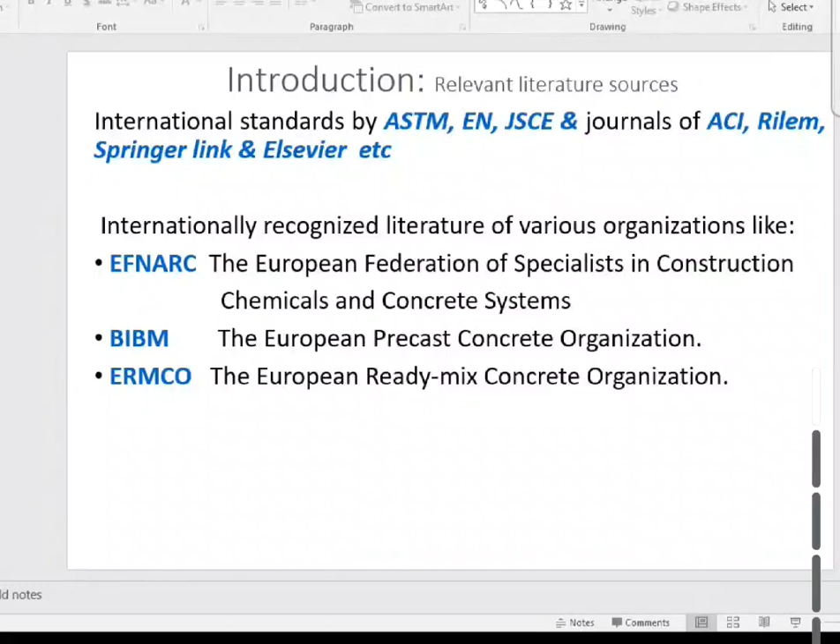Anyone else who has listened to this? Okay, is this slide visible to you now, which I'm sharing with you?

Yes, sir. So, okay, talking about self-compacting concrete, this is the concrete which can, you can say, compact itself without any kind of external effort.

The standard regarding this, which we use, is EFNARC, which normally deals with this development, and ACI is also there. ACI Committee Report 237 deals with self-consolidating concrete.

It is defined as a highly flowable, non-segregating concrete, which can spread into place, fill the formwork, and go into the reinforcement without any mechanical consolidation. You don't need any mechanical effort. This is the definition by ACI 237 report.

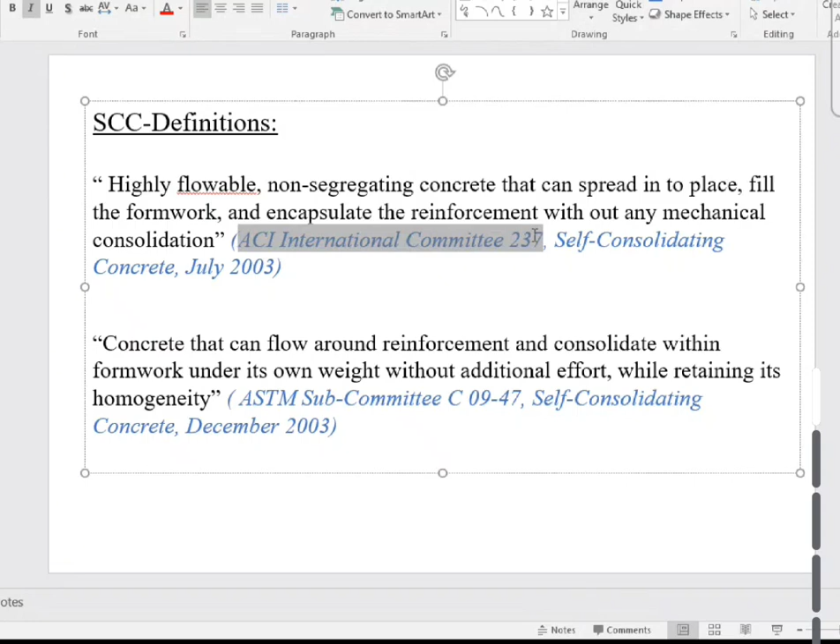However, talking about the ASTM subcommittee report, it says that concrete can flow around reinforcement and consolidate in the formwork under its own weight without any additional effort while retaining its homogeneity.

These two definitions are there by ACI and ASTM, but you can say that any concrete which is self-flowing, you don't need any kind of external effort to make it flow or compact, that is called self-compacting concrete or self-consolidating concrete.

Are we clear? Students, are we clear?

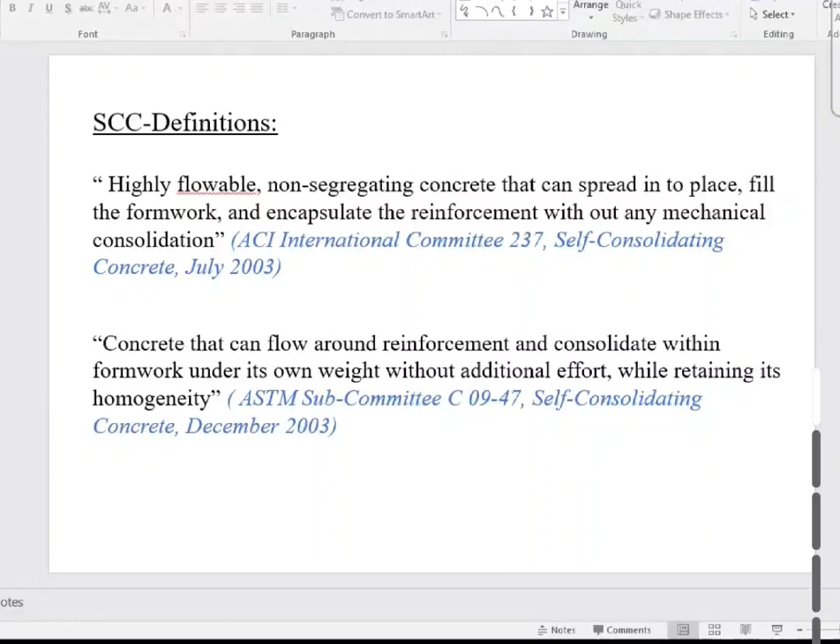Okay, what is the difference for self-compacting concrete? So the self-compacting concrete has three characteristics.

Number one is its flowability. Number two is its passability through the reinforcement. And number three is its stability, that there is no bleeding or segregation. So these three things are there.

Normally self-compacting concrete is highly fluid and consistent like honey. So you can say that a self-compacting concrete can be classified as that which can fulfill these three conditions in fresh state: it is flowable, it is passable, and it is stable.

That there is no bleeding or segregation. Then you can name it as self-compacting or self-consolidating concrete.

Now we talk about fluidity and consistency. There is a term called rheology. The rheology means how easily concrete can flow, or how much effort you need for the concrete to make it flow.

So you see with this plastic viscosity and yield stress, the self-compacting concrete is highly viscous or plastically flowable without any kind of yield stress. Normal concrete needs more effort to make it viscous or flowable.

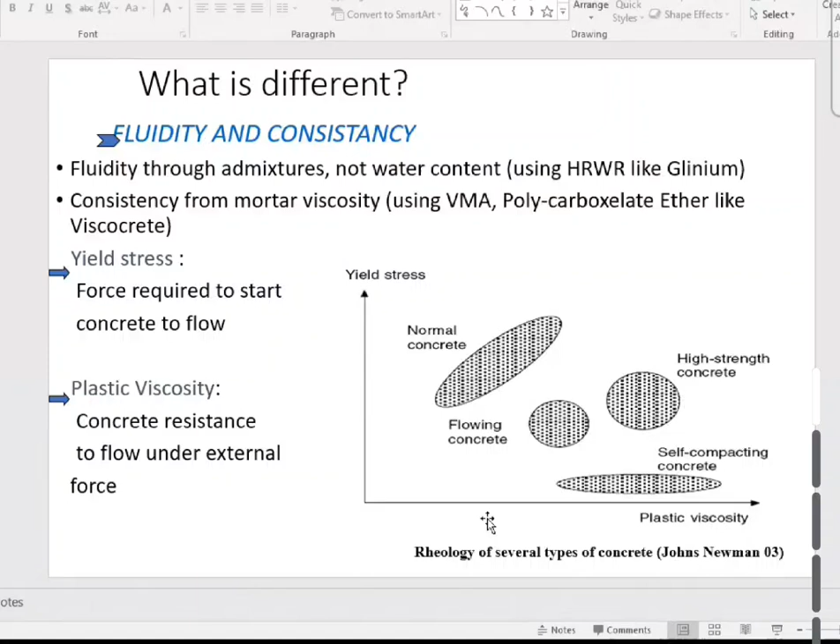Now, can you tell me how to make the concrete flowable, passable, and stable without increasing its water to cement ratio? How can we make it flowable concrete?

Very right. We can use different kinds of admixtures which can be used as high range water reducing admixtures, HRWR we name them, this is the real name. You can name it as high range water reducing admixtures. These admixtures can be by Sika, by BASF, by any chemical industry, but they are used to make the concrete flowable with lesser water to cement ratio.

So how these chemical admixtures work, can you comment on it? Because we are not increasing the amount of water content, so water content is same. So then what is the phenomenon which is making the concrete flowable?

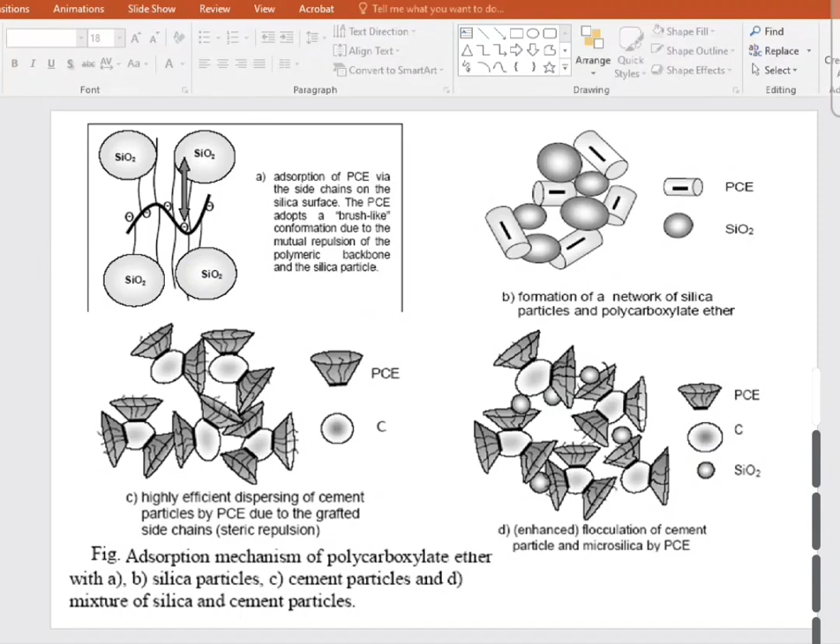Now there are also other kinds of admixtures. Once you don't increase the water to cement ratio, there may be a possibility that your paste volume is low. Once your paste volume is low, the chances are that your aggregate content will be higher and paste volume will be lower, so you will not get a thick mixture. You may have a very high volume of aggregates, low volume of paste, and your system will not flow properly. So again, the problem in...

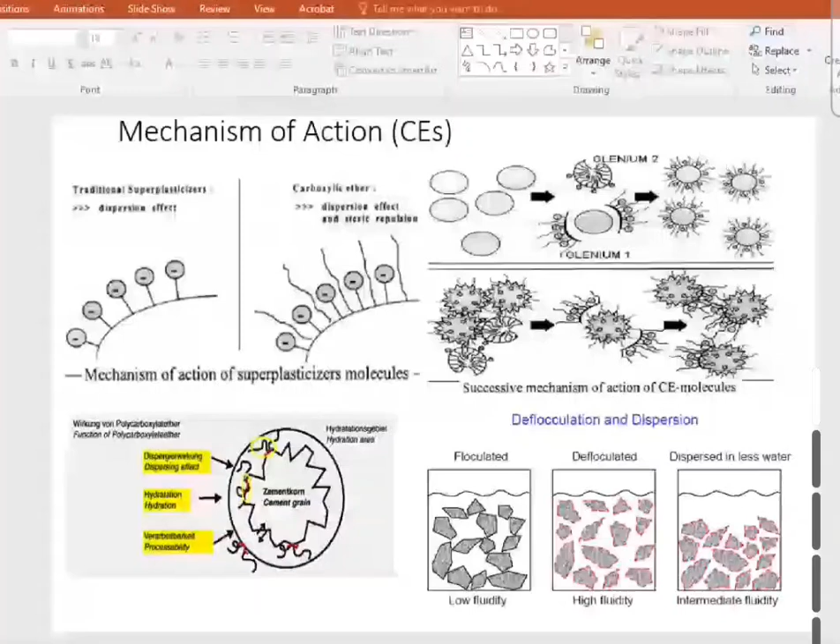the self-compacting concrete is that it seems it should be consistent as well. Consistent means it should be consistent like honey. So what we use in this case is VMA. What is VMA? Viscosity modifying agents are being used in these mixtures. So what is this mechanism? It is also gel-like, which can retain water by adsorption or swelling.

So this is a mixture. Once you add water into it, it can form a gel network. This gel network is more like a polymeric structure, something like this. And this gel gives you the apparent picture that the mixture is more consistent. This is how we see this gel formation. Are we clear? So two types of admixtures are used in self-compacting concrete: number one is high range water reducing, and number two, we use viscosity modifying agents. Are we clear?

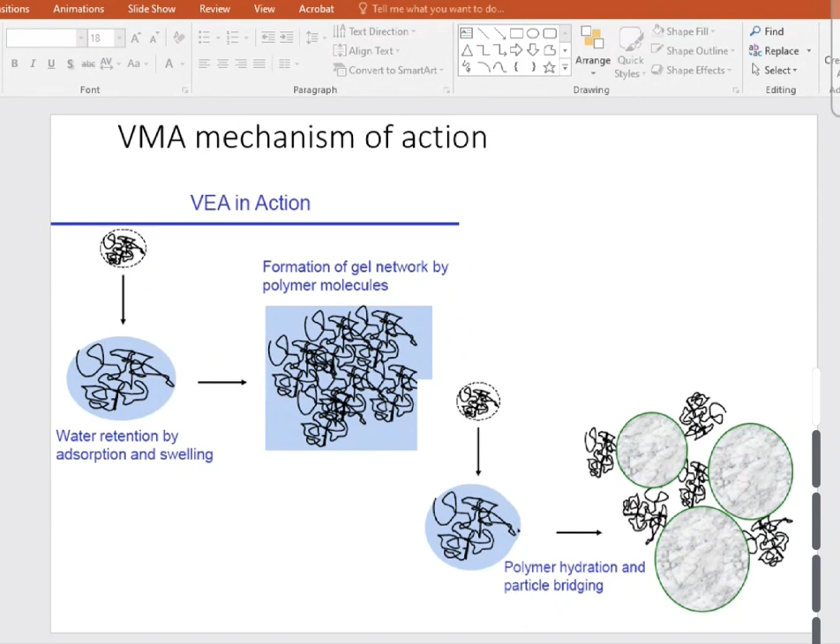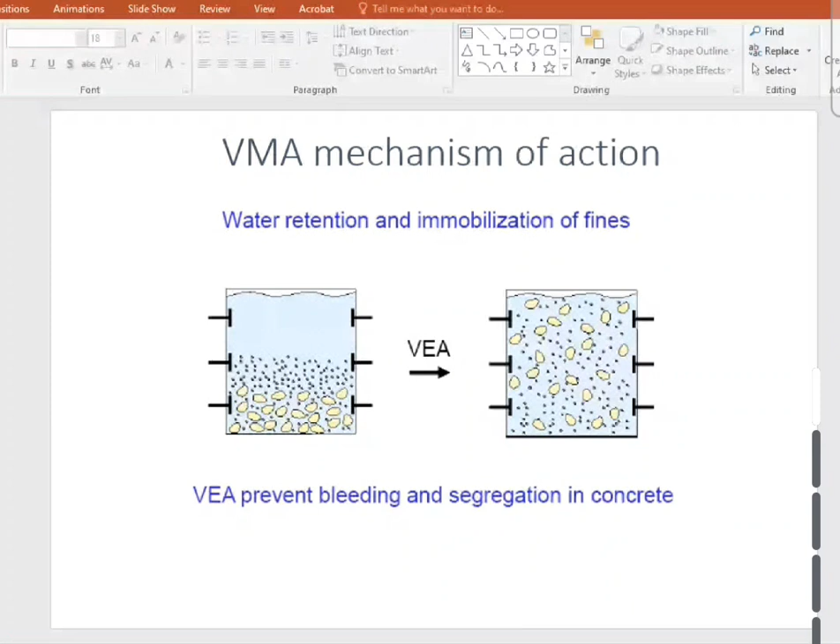So if you see over here this schematic diagram, the mechanism shows there is a settlement of larger aggregates, then smaller fine aggregate, then water. But once we add the VMA, this viscosity modifying agent, it makes it a homogeneous mixture that immobilizes it, so all the aggregates and fine aggregates are well dispersed into the system. This is the beauty of VMA, how it increases the viscosity and you can say gel formation of the structure.

Now if we compare self-compacting concrete with the regular admixture or regular concrete mix design, in normal concrete, how much is the percentage of coarse aggregate there? Can anybody tell?

But in case of self-compacting concrete, we have a lesser amount of coarse aggregate, whereas fine aggregate is slightly increased. We normally have 30 to 35% coarse aggregate, and the rest 30 to 35% is our fine aggregate. So what does it mean? We are increasing the paste volume in self-compacting concrete. Are we clear?

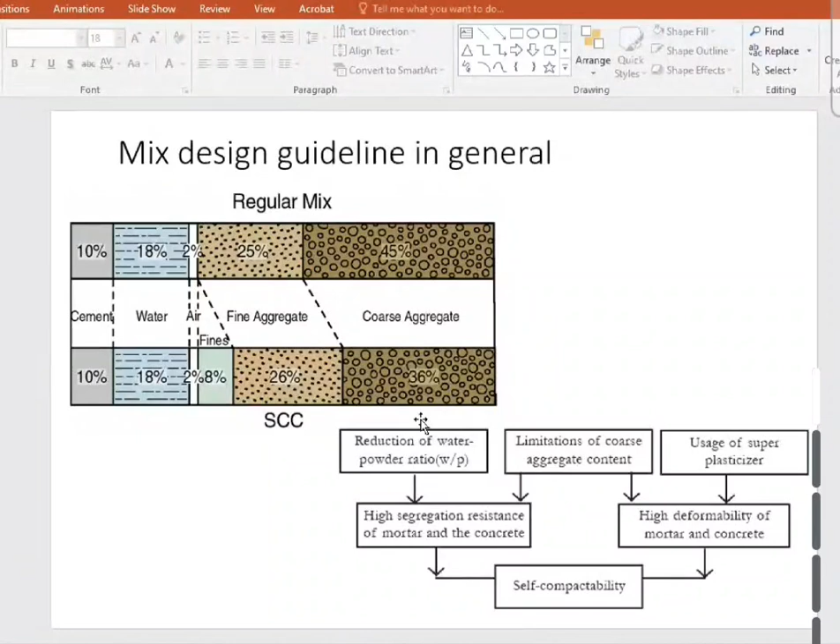So I have discussed with you initially the definition of self-compacting concrete, what are chemical admixtures, how they perform, what is VMA, what is the mix design, how it proceeds. So next is, what is the advantage or significance of it?

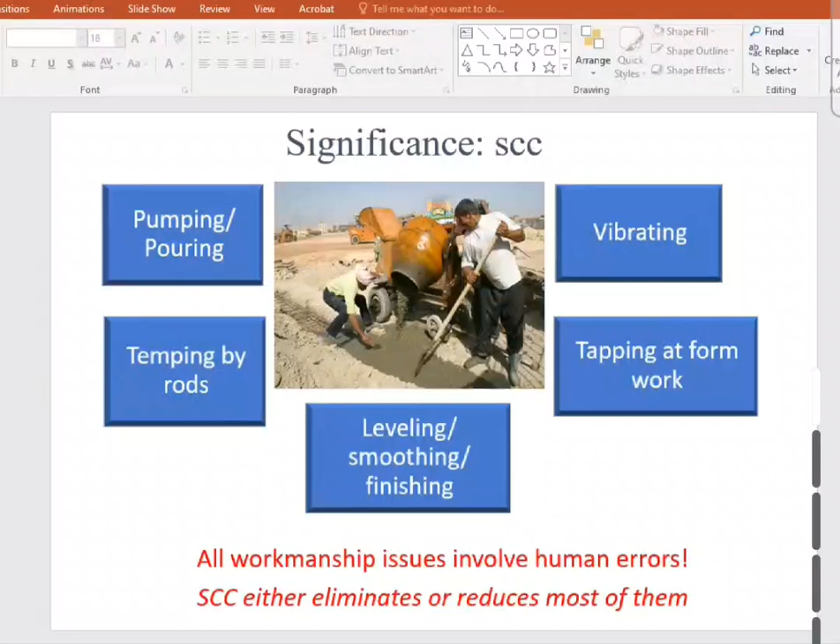You don't need any kind of labor. Even seeing the volume of the site, you don't see any labor over there - just one mixing concrete truck, and a pipeline which spreads the concrete. This is the major advantage of self-consolidating concrete.

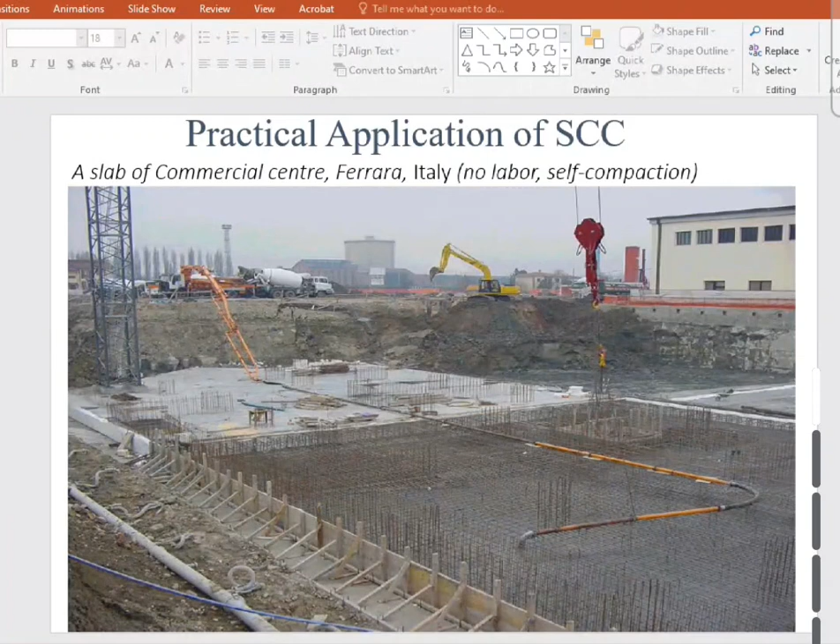Are we clear? Yes, sir. Now talking about cost effectiveness, although its initial cost is high...

If we see its labor cost, the overall cost of self-compacting concrete is about 92.5%. However, our conventional concrete costs us 100%. So it means we can save a huge amount of cost by using self-compacting concrete.

This whole credit goes to Professor Okamura, who is the father of this invention, who developed this concrete back in the 80s. He got this idea from mud flooding - mud flood goes everywhere and settles and solidifies everywhere. So he said, why not develop a concrete which can go everywhere and consolidate everywhere. Through this we can reduce labor cost, and now see how many people have done PhDs on it - it's now almost already a commercially available material.

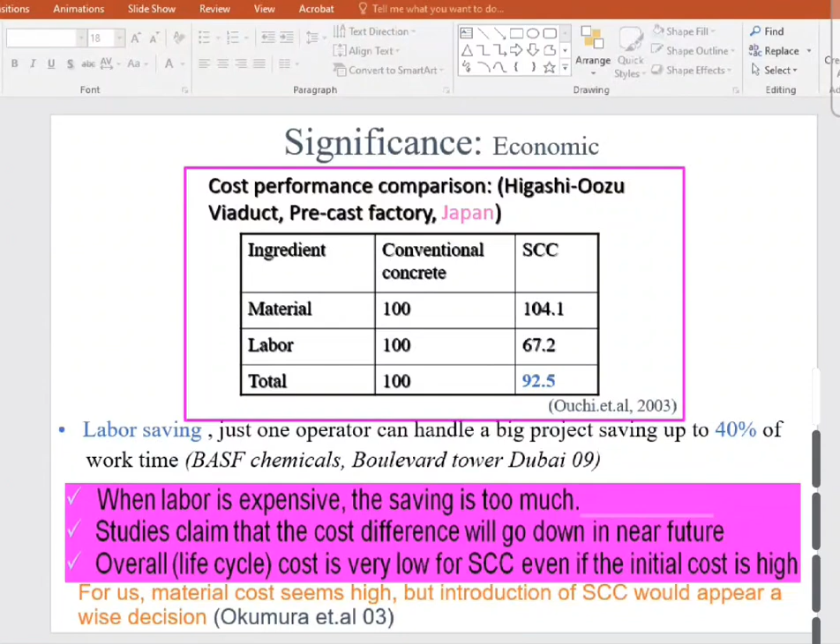Are we clear? So that's all about the significance. Then comes the chemical admixtures.

Chemical admixtures are of three kinds - three generations. Number one is sulfonated melamine formaldehyde, then sulfonated naphthalene formaldehyde, and the third one, which is normally used nowadays, is polyether polycarboxylate based - PCE based, also called polycarboxylate based, ether based. These are high range water reducing admixtures.

Then there are viscosity modifying agents. I have discussed them, how they develop, what is the mechanism behind them - we have already discussed this, isn't it?

Student, is it clear to you? Yes, sir.

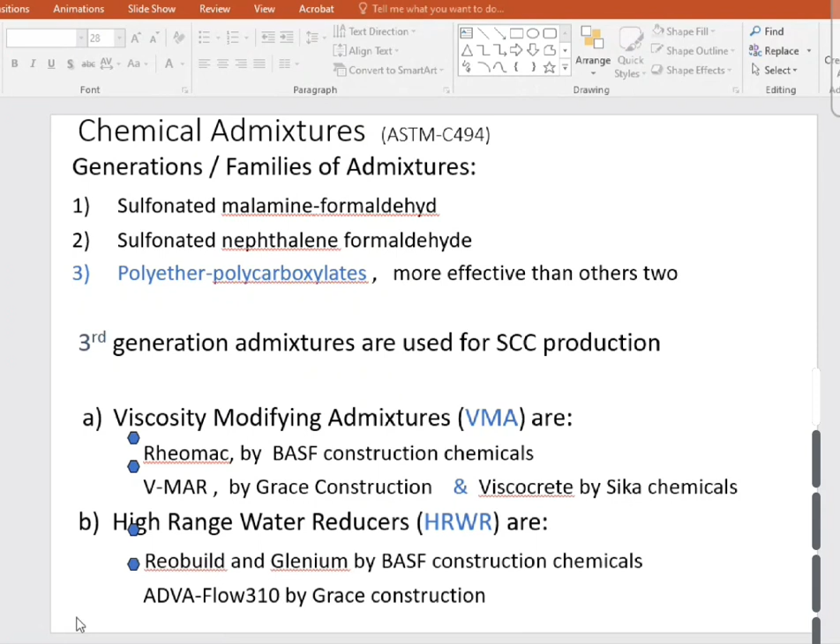Students, is it clear to you or not? Yes, sir, it is clear.

So I'm going to share these slides with you. Then comes its testing.

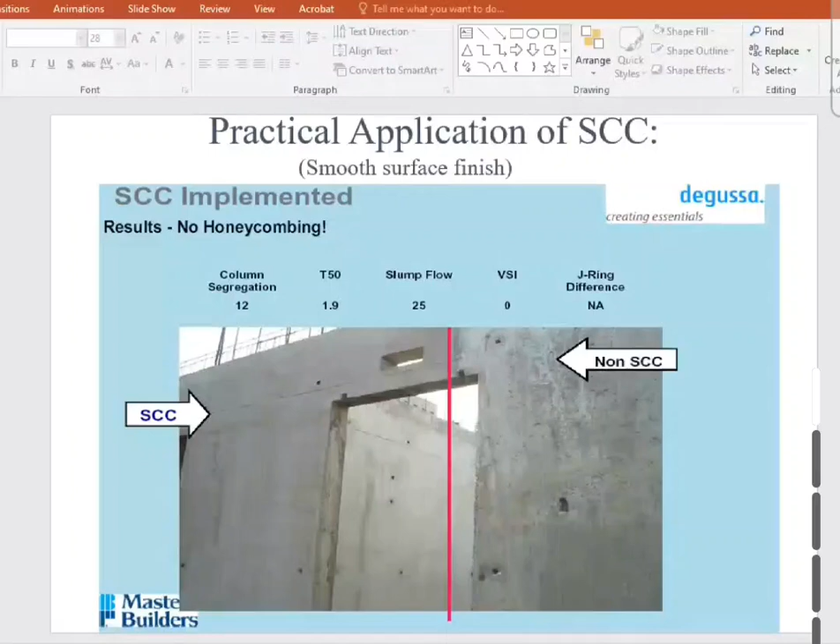These slides are regarding practically available projects which people have used internationally. The world is doing work on it. We are unable to know - maybe one of you was telling that on some project they are trying to develop this concrete. I don't know if it is being developed or not.

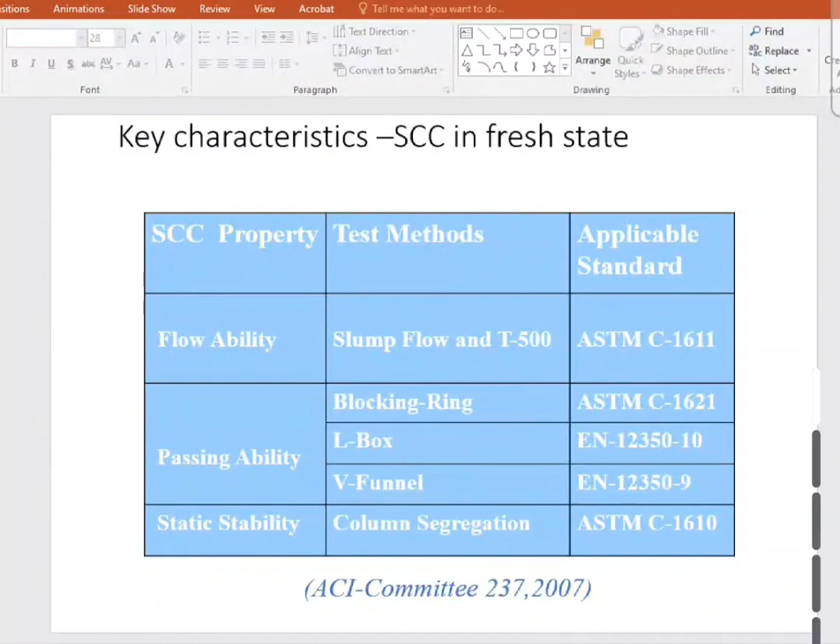All that, it reduces a lot of cost. So talking about the tests, their testing is slightly different than the normal test. If we go for normal concrete, we have this slump cone test, isn't it?

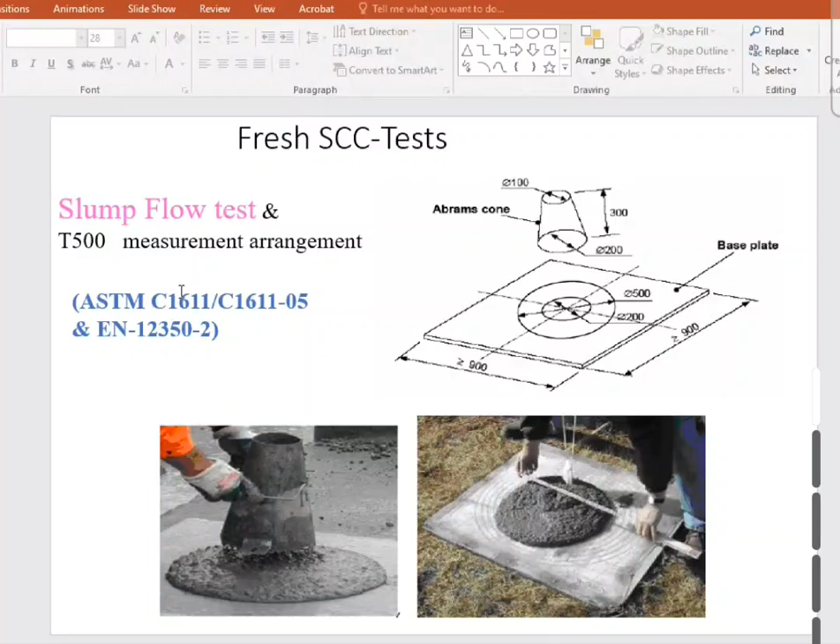So these are mostly two common tests. I don't know if this is being used in the market or not - the guy can tell you on this. Yes beta, this is what you are doing, just this test, right?

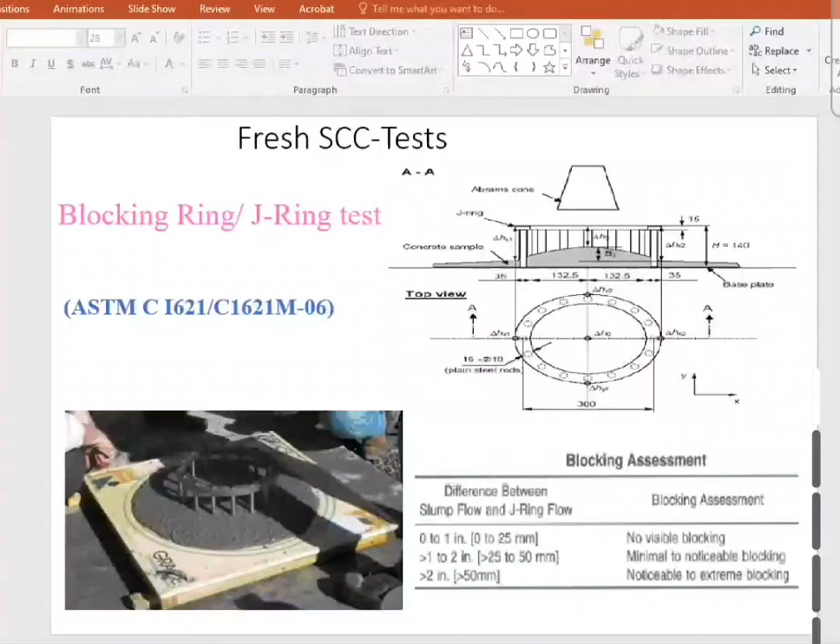So same is with the V funnel test class as well. This is being defined by the EFNARC standard. Right at the start, in the very first slide, I told you these criteria are by EFNARC 05. They are defining it actually.

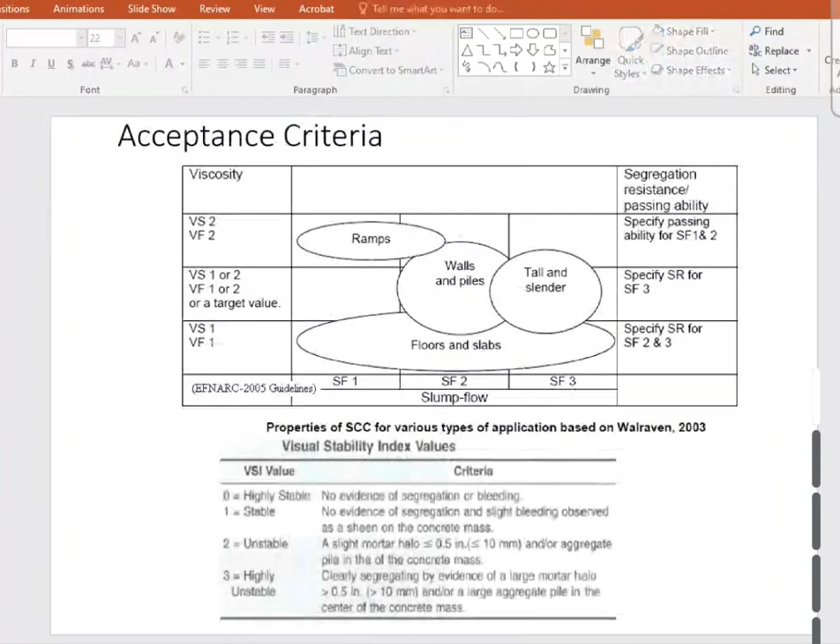So for this V funnel, the last one, you fill it and then you open it and see how much time it takes to get empty. How much time does it take to empty? So that time is defined as 10 seconds, 7 seconds, 27 seconds, 3 seconds - however much time it takes. Accordingly, we define it as class VF1, VF2, and so on.

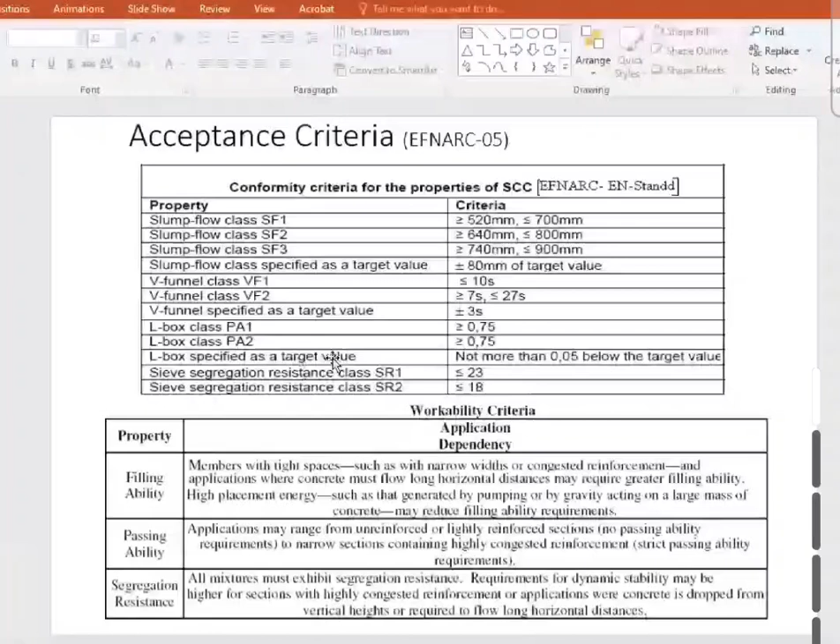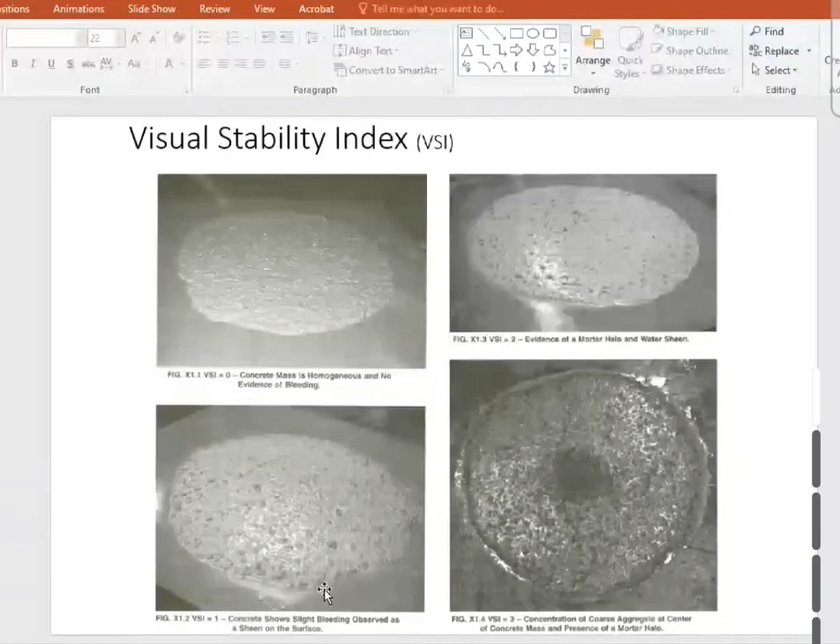So you see this is homogeneous, no water on the sides. Here you have complete water sheen - you see shining sides over there, water is coming over there. Then you see bleeding is there, surface has small bleeding in the concrete. Here we have segregation right in the middle.

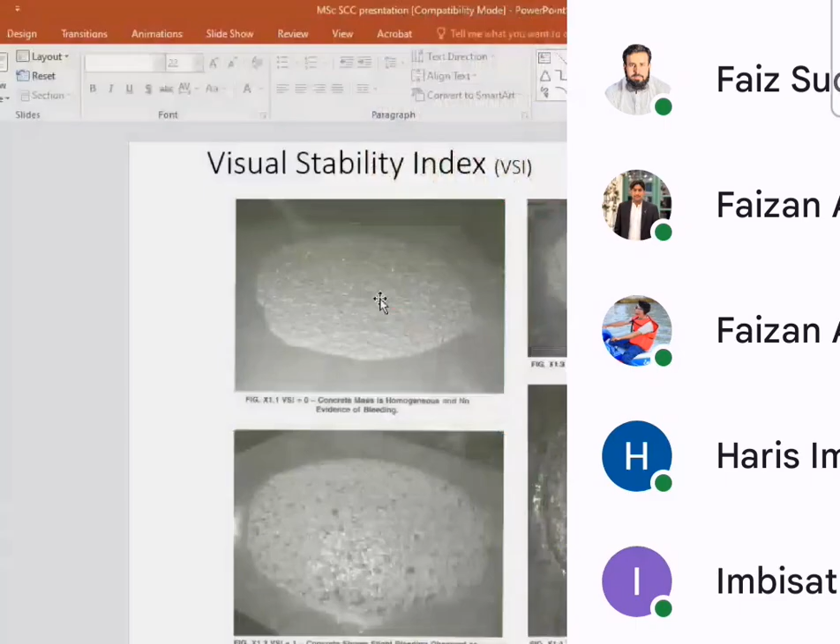So these 3 are not desirable. We need a homogeneous, well-consistent concrete, without any kind of bleeding. We need this kind of concrete, otherwise we can compromise on the strength or other characteristics. Are we clear?

So this also has been defined - somebody called it the visual stability index. You just see the mixture and then you can define whether it is workable or usable or not, whether we should use it or not, and how to take it. Are we clear?